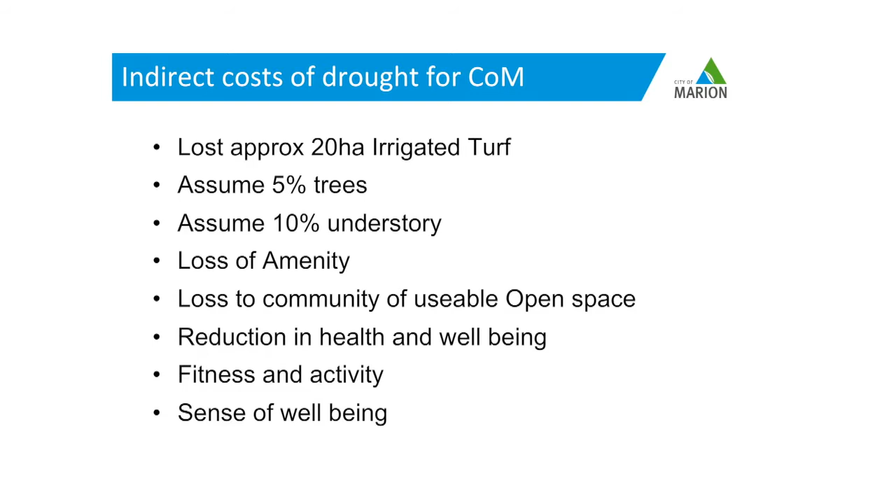Direct costs of the drought were intense. Water costs have gone up - potable water since 2006 has gone up 250%. Back in '06 we were paying $1 a kilolitre. We're now paying $3.50 a kilolitre.

That irrigated turf probably cost us around $3 million to replace. Our irrigation systems were turned off for 8 years - you go and put them back on again, they don't work. So we're currently upgrading our irrigation systems. We spent $2 million in the last 2 years, and probably got another $3 million to go. Of course, we're replacing our trees as we go, our understory, and hopefully increasing that value to the community.

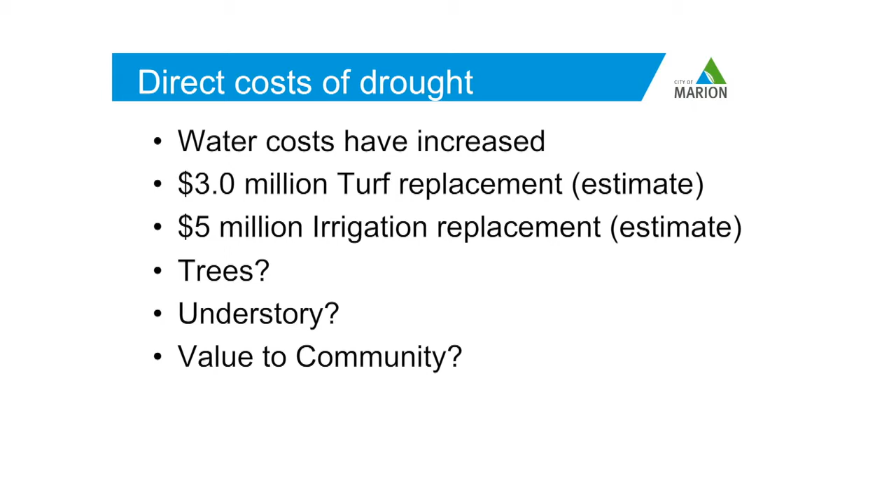I mentioned water costs have gone up - so the blue line represents the cost. Back in '04, '05, at $1 a kilolitre, we were using 300 megs, costing us $300,000 a year. As we move through the years, our consumption's gone down and then sort of flatlined through the drought, gone back up a little bit recently, until the last year or two, where Oaklands Wetlands is now commissioned and operating in anger, and we're reducing our mains water consumption and cost, and that's why the graph drops off.

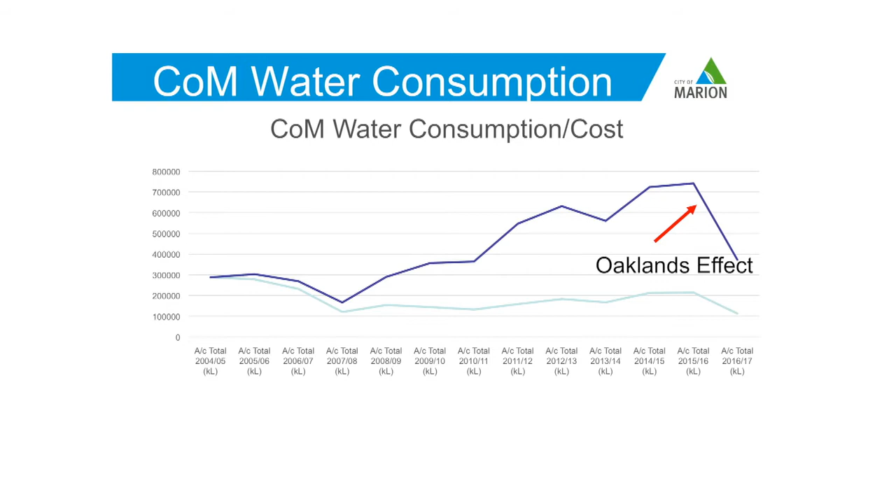But our water bill a couple of years ago was $700,000 a year. If we were irrigating what we were irrigating back in '04, '05 - around 150 parks and gardens, ovals - our water bill would be over $1 million today. So we've tried to be a bit more astute about what we water and how we water it.

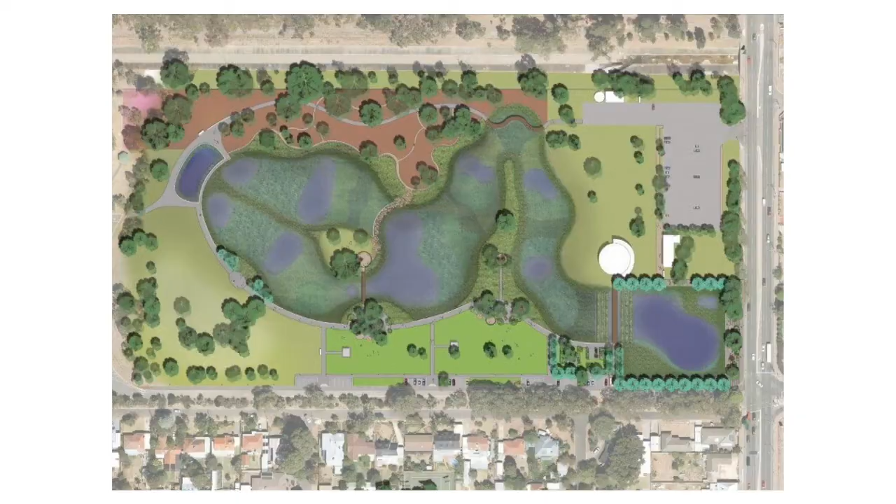Rob's talked about this slide, so I'll really quickly whip through it. I pinched this from Rob - I made mine look a lot better, actually. It's much more sexier. Don't you think?

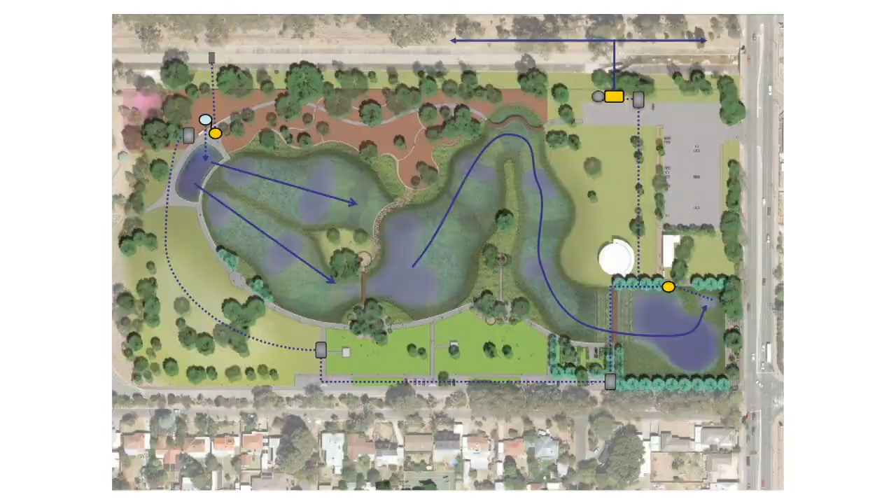It's a shame I haven't got photographs of how the site looks today, because it's matured since Rob's photographs—probably nearly 4 years on since then. All the understory we planted along this shore is more of a biodiversity corridor that's now well established. Our locals have really got involved and helped us plant that, so it's a real community asset with community ownership, and the site now sits into its landscape quite well.

Rob mentioned why council tore down the roundhouse—great question. We looked at all sorts of things to do with that roundhouse. It's an iconic building, architecturally brilliant. I loved it, actually—it was a great vantage point to sit up on the first floor and overlook the wetlands. But it needed a new roof, the wiring needed doing completely, and it was full of asbestos. It was a $500,000 bill just to get anybody in there, and then we put it to market—no one really wanted it. So we knocked it down because the kids were ripping it to pieces and it was becoming full of graffiti.

Now what we're about to do is rebuild a rotunda type of building there—like a bandstand, same sort of size, big. It's going to be a community facility for encouraging open air events and bands, to get the public more involved. We've built at the front here a recreational plaza, a BMX track, skateboard park, parkour—if you guys know what that is. The facility's definitely matured since we built it.

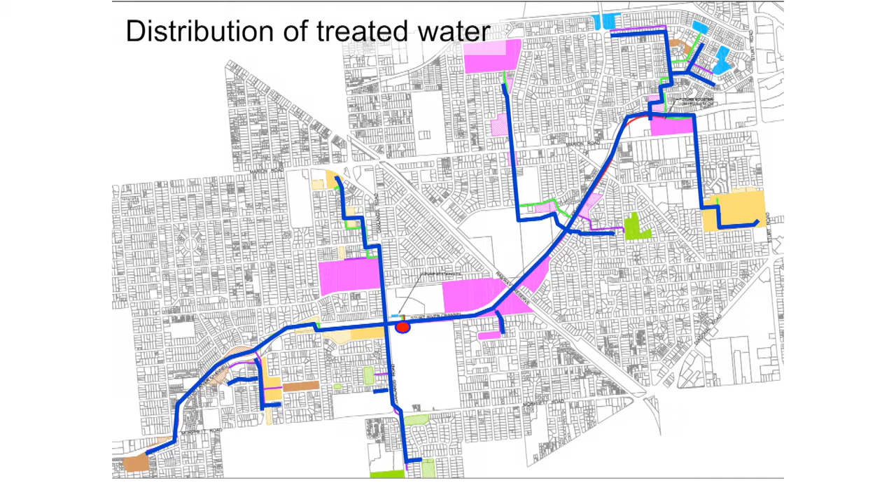Rob's shown this slide as well—I'll just go back over it, because the intent was to irrigate those 35 reserves. Therein lied the challenge: back when we were trying to justify a $9 million expenditure, you look at demand across the city and add a bit on to make sure the site gets built for all the right reasons. But the demand at the time was slightly overcooked, because the old philosophy was we'd irrigate fence to fence. Now we don't do that—we apply codes of practice, alternative treatments, and dry land landscaping and trees. We're really only irrigating half the footprint we said we'd irrigate post-drought, which is good because we've got other customers for that water, not just our own public realm. And despite it no longer being mains water we're pouring on grass—it's treated stormwater, not drinking water—you still want to use that resource wisely.

On that supply and demand equation, Rob mentioned the scheme was built to harvest 400 to 500 megalitres per year. Harvesting isn't really the issue—he's right, there's plenty of water in Sturt Drain, so we can take out as much water as we want. We don't, because we're using energy when we do so. We take out what the wetlands need to be healthy through summer, and what we need to treat and inject during winter. We've actually reduced what we've been harvesting over the last few years and increased steadily what we've injected into the aquifer. As you inject more water and extract it in that seasonal cycle, the aquifer gets more porous, and you're able to inject more as you force water through that big sandy tank we're lucky to have under our feet here in Adelaide. Without that sandy tank, the hydrogeology is ideal here—we couldn't do schemes like this. We were quite lucky to have that big sandy reservoir to put our water into.

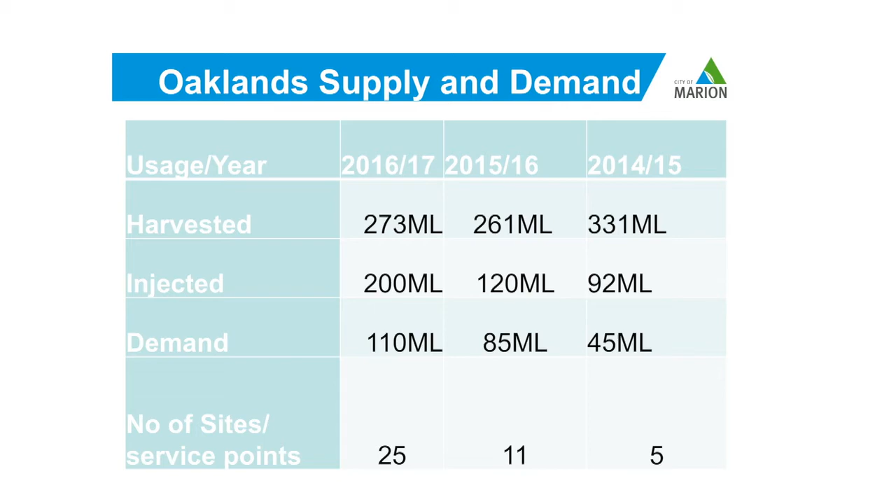We originally had 5 sites connected, and we went for low-hanging fruit—that was our really big sports ovals. Since then, the irrigation systems have been renewed and replaced, which is that $2 million we've spent, and we've gone from 5 sites to 25 sites. We'll probably add a few more this coming summer as well.

The system's very smart, very intuitive—an idiot can run it, which I think is why they employed me. This is our smart operating system, all bells and whistles. It's PLCs, human machine interfaces through a SCADA type system, which is on the cloud—I can see it on my phone. I was recently away on holiday and got an alarm through my phone that the pump had failed. You just log in, reset the pump, and off it goes again.

So I think that was about $150,000 in that $9 million price tag, worth every cent really, because we've definitely used the smarts to drive the system and optimize the amount of water we take and reduce our energy consumption.

Also, what we've done, which we never really envisaged, we've added smart technology onto it, we now measure water quality throughout the wetlands. We sell water to the bus depot, so we obviously monitor how much water they take.

We've got a truck fill functionality, I'll show you in a minute, it's a truck that takes water for construction type activities. They were using drinking water to compact dust or to suppress dust and compact soils. They're now using treated stormwater.

And our groundwater bores, that's obviously a very valuable resource, groundwater. Not only did we suck the reservoirs and rivers dry during the drought, we went after groundwater, and we reduced our groundwater in Adelaide by about 6 metres.

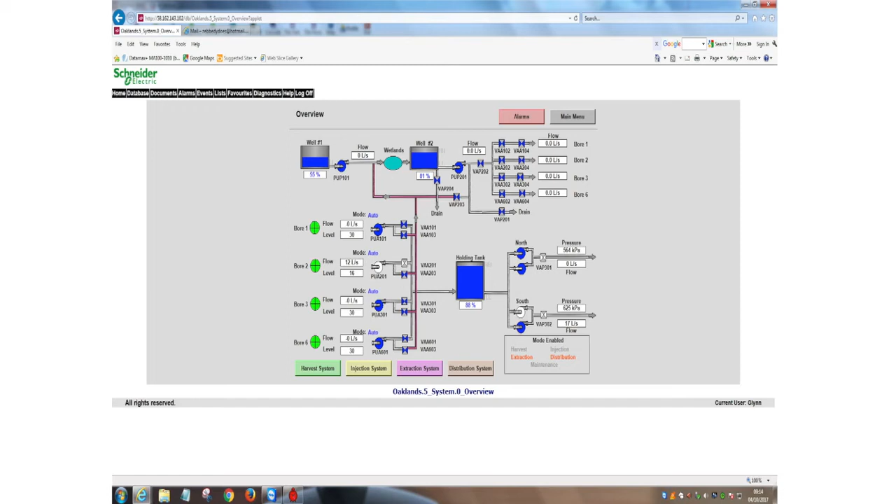There's a more detailed drill down of how Oaklands works. There's the well where we harvest the water in the river. There's a pump which pumps water, and we measure the flow and measure EC. It pumps it into the wetland, representing the wetland, and then from the wetland we pump it into the aquifer. That's done during the winter. In the summer we pump it out of the aquifer into a balancing tank, and we pump it along the north and south corridor along the river to our irrigation demand.

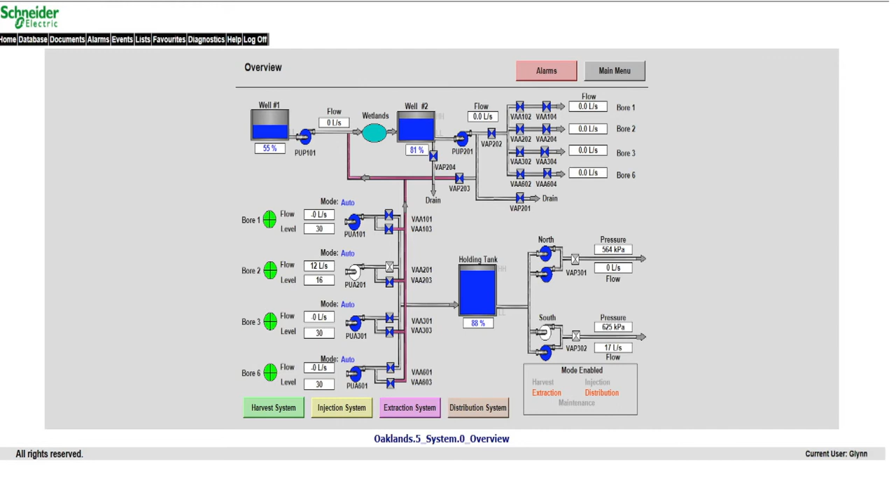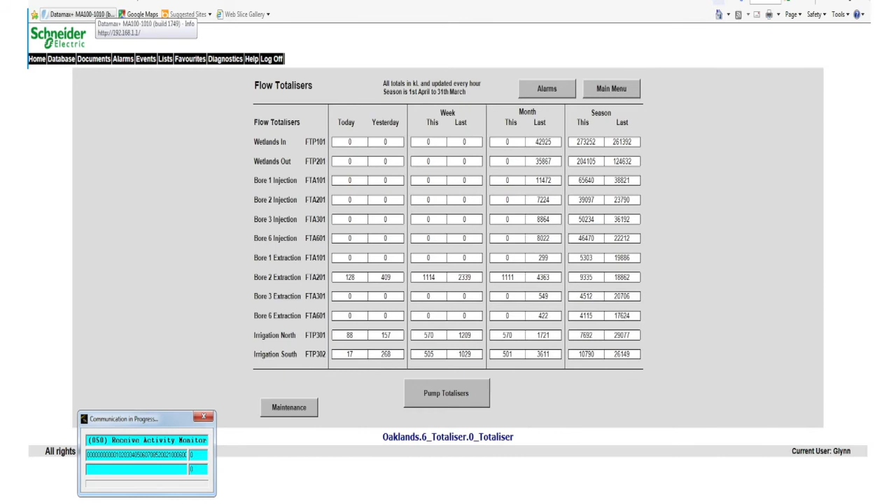We measure flow. Obviously, if we're selling water, we want to know how much we've sold to whom, and how much we've used internally. We measure water quality. We've done this with Flinders University, they stuck on some surface water monitoring equipment, which we connected to our SCADA, and that data is now being used by the students who can dial in live and see how the water is responding.

And they're using that to really optimize how we take water from the river, how we treat it, and how we put it into the ground.

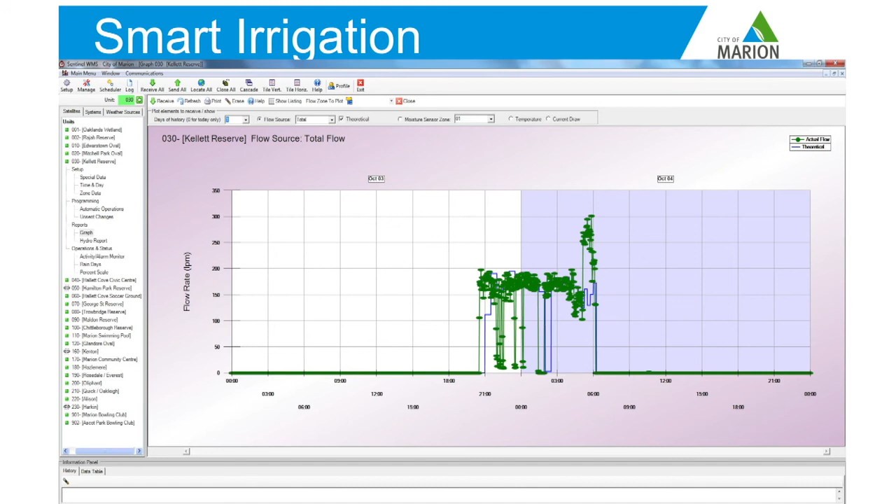I've mentioned smart irrigation, we obviously use this to drive our irrigation systems, so we don't turn on irrigation systems all at once and suck out too much water from the Oaklands, which then the pumps can't cope with. So we've got the demand side of the equation and the supply side of the equation, all controlled by smart technology. Customers, I mentioned we've got a water truck taking water out.

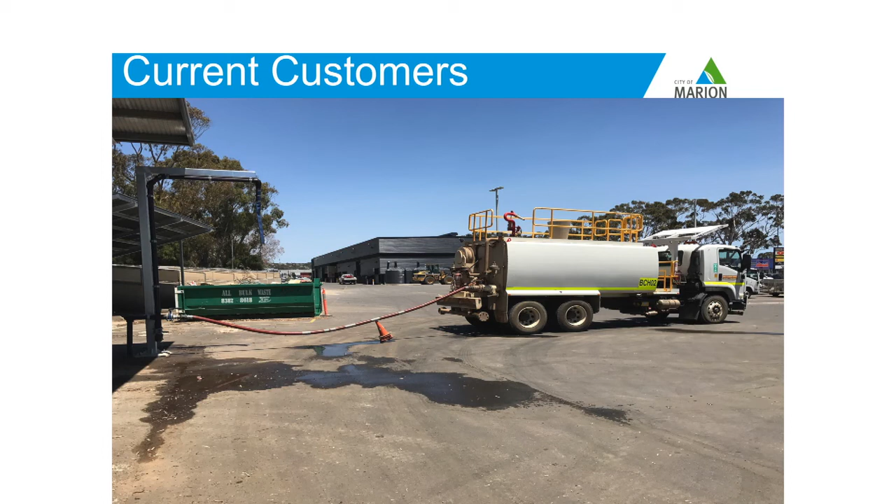This is really Gateway South doing the South Road upgrade. They're using a lot of water, which would have been expensive mains water. Our street trees, we've got our own trucks which take water from Oaklands and they water our own trees.

So looking towards the future, we're currently running Oaklands in second gear. It's probably got 5 or 6 gears. We can ramp up the injection and the harvesting, and we're hoping to service the Tonsley precinct, which is being plumbed for dual reticulation, so we can go inside buildings for toilets and hot water.

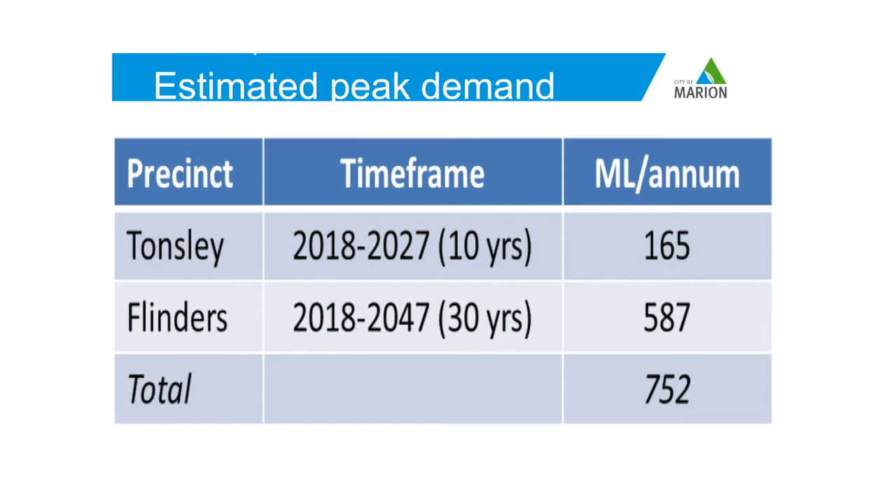I think the attractive things are for cooling, we're looking at district heating and district cooling, and we're using our water for that. And Flinders University are doing a precinct development type plan where again they want water inside buildings for heating and cooling. So the wetlands, as Rob mentioned, have been built to be future-proofed.

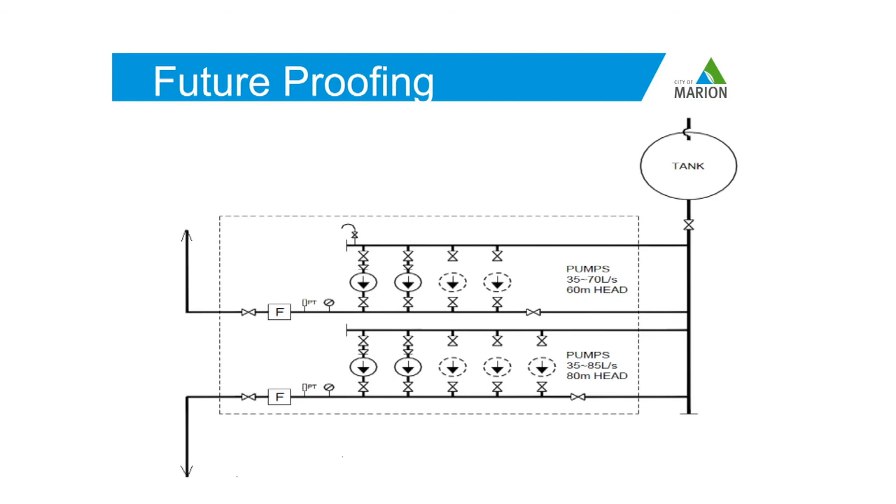We add on another pump in the harvest pit, we can suck more water out of the river. We can add on more wells to put water into the ground and take water out of the ground. We can add on another balancing tank, which services the pumps, and then we add on more pumps to provide more pressure so we can pump more water further afield. So the whole thing is modular.

And lastly, I think the future of these stormwater schemes in Adelaide is to combine them with our wastewater treatment plants, our sewage works. We do a lot of good work here in Adelaide where we treat sewage water and we pump it into Adelaide parks. It's going to the new hospital. It's treated to a very high standard.

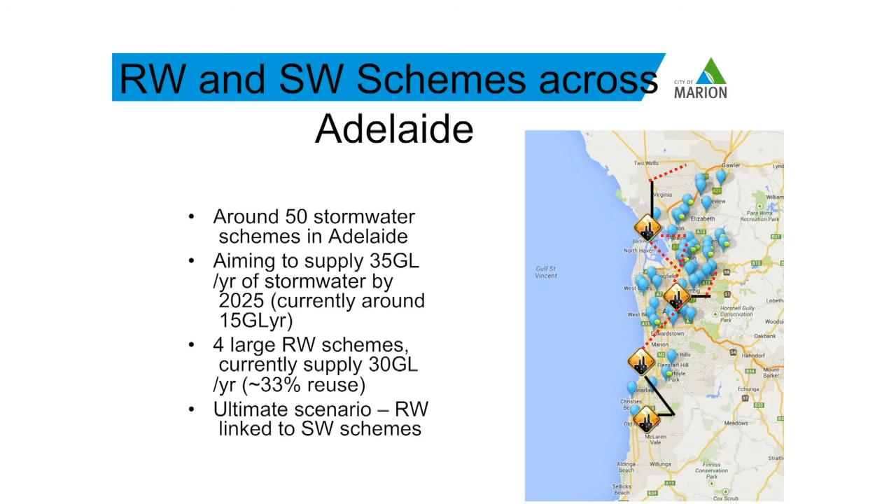So you've got treatment works to the north, Glenelg, and then 2 down south. I see these schemes being linked with our 50 or so stormwater schemes and having a combined network which will enable us to deliver treated water, alternative water, as against drinking water, which is obviously very expensive. Why would you pour drinking water onto grass?